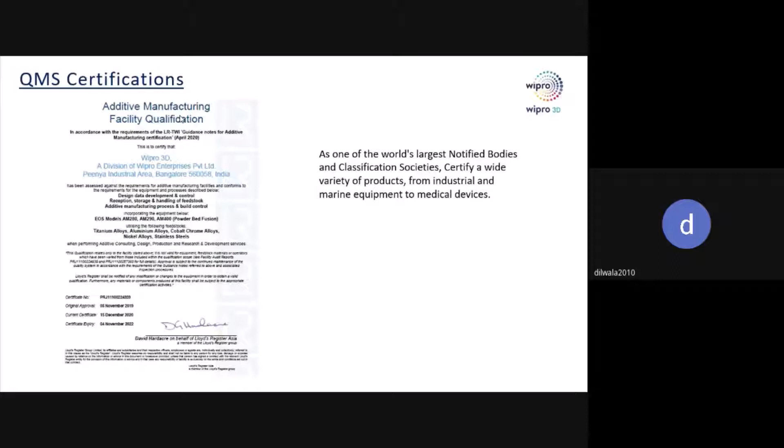This is the reason oil and gas customers from Europe and USA show interest in Wipro 3D. Without these sort of certifications, getting orders from them would be really difficult. We also have Honeywell certification. We had an audit by Honeywell.

Honeywell have their own certification process, which they call Approved Processing Source List or APSL. They do a detailed audit very much similar to LR, but more stringent, more detailed. They look more into how we manage the powder, how powder quality is ensured, how we control the build, how build quality is ensured. These are strikingly different from standard processes, as these fall under special processes.

All OEM customers conduct their own special process audits in line with the NADCAP audit checklist. If a supplier is approved by NADCAP, then they approve them directly. If they are not approved by NADCAP and they are going to perform any special processes, then they do their own internal audit as per the NADCAP audit checklist, and they provide certification.

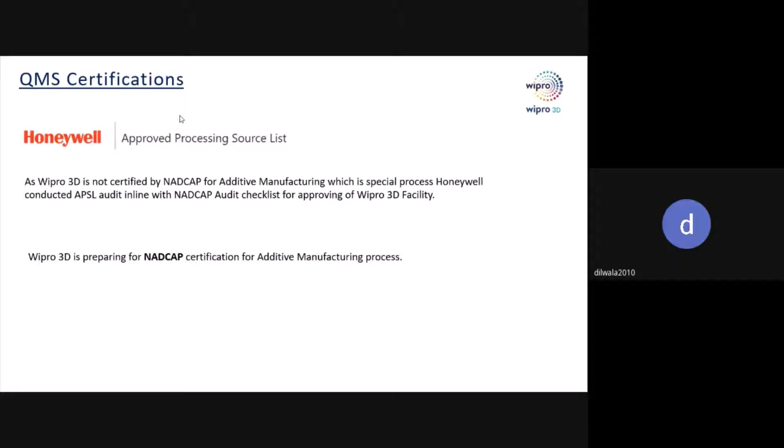Because we were going to do 3D printing of parts for Honeywell, and we don't have NADCAP, Honeywell conducted an audit and has given the certification. So these are the different certifications related to different industries. Let us assume you are an automobile industry supplier. Then you need to have TS 16949 certification, which is very much similar to ISO plus the special requirements of the automobile industry.

If you are an aerospace, space or defense supplier shipping parts to customers, then you need to have AS 9100D or EN 9100D, which are both equivalent. This is ISO plus additional requirements related to the aerospace and space industry. If you are performing special processes for aerospace, space or defense, you need AS 9100D as well as NADCAP certification. We will discuss more about NADCAP in further slides.

If you are supplying to medical industry customers, then you need to have ISO 13485 certification. If you are doing special processes for oil and gas customers, then you need Lloyd Register certification. So these are the different types of certifications related to different industries.

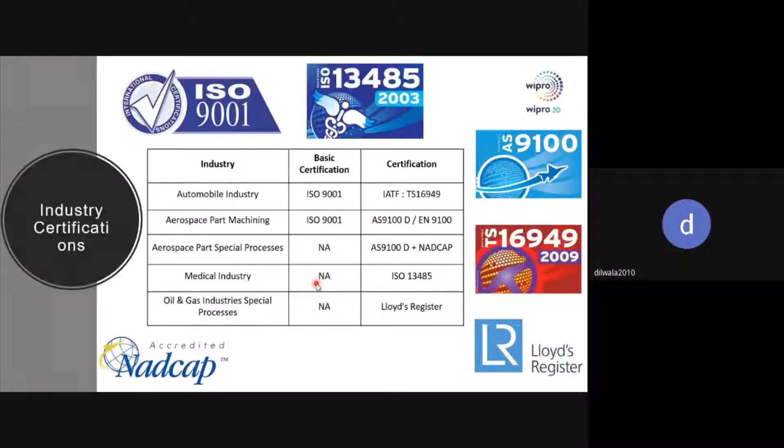International Aerospace Quality Group. This is the body which establishes all the aerospace standards. It was formed by AAQG, the Americas Aerospace Quality Group, EAQG, the Europe Aerospace Quality Group, and APAQG, the Asia Pacific Aerospace Quality Group. All these three quality groups together formed the IAQG Council.

All the AS standards like AS 9100D, AS 13002, AS 13003 are released by this IAQG Council. Say there is a standard called 9100. If we got certification from AAQG, the certification will be named AS9100. If we got certification from EAQG, the certification will be EN9100.

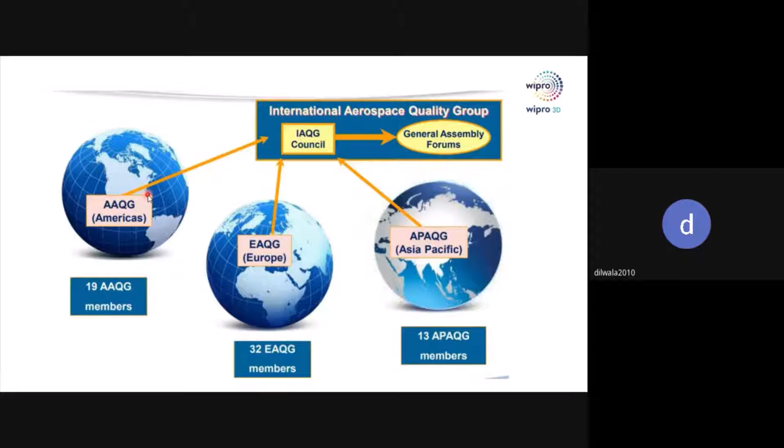If we got it from APAQG, it will be KS9100, which is the Korean standard, or JISQ9100, which is the Japanese industrial standard. The requirements are the same, only the certifying body differs. So all these are equivalent standards. Then comes AIAG.

In the automobile industry, AIAG was formed by the Big Three way back around the 1980s: Ford, Chrysler, and General Motors. These three realized that as they need to produce thousands of parts in a day, doing 100% inspection was not possible, so they needed to identify a way where they could get away with doing sampling

inspection. So these three started AIAG, and they released several standards like the APQP manual, PPAP manual, FMEA manual, MSA manual, and SPC manual. All these different standards they released are more suitable to automobile series production. Currently several other companies have joined the AIAG Council.

PRI is the main certifying body for NADCAP. NADCAP stands for National Aerospace and Defense Contractors Accreditation Program. So PRI is the main certifying body for NADCAP, and this is a not-for-profit organization affiliated with SAE, Society of Automotive Engineers. Generally, OEM customers ask for AS9100D certification or equivalent for conventional machining suppliers, and for special process suppliers, you need to have NADCAP certification.

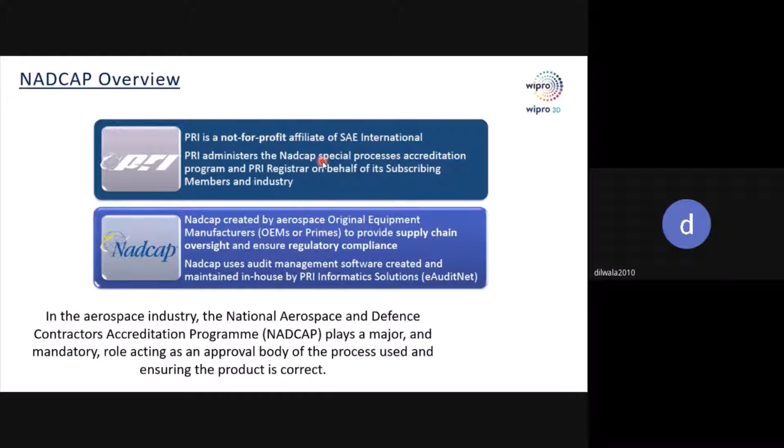Just if you are wondering what these special processes are: any process which modifies or changes the inherent physical, chemical, electrical, or metallurgical properties of a particular item, or non-conventional methods which remove or deposit a material on an item during or after fabrication, which cannot be evaluated by non-destructive means, or those used to maintain process controls such as non-destructive testing.

So in our case, which is 3D printing or additive manufacturing, these two clauses are applicable for us because we do modify the physical, chemical, and metallurgical properties of an item. And in this, we deposit the material on the item, which cannot be evaluated by non-destructive means. So without doing a tensile test or some other test, you cannot say that your part meets the different requirements, right? By non-destructive means, we cannot say that our part meets the requirement.

So in special processes, what they suggest is to identify all the inputs which affect the output, and have control on all the inputs. If you are controlling the inputs, automatically you will have control on the output. So identify all the inputs, establish controls like upper limit and lower limit for all the inputs, and control them so that you will have control on the output.

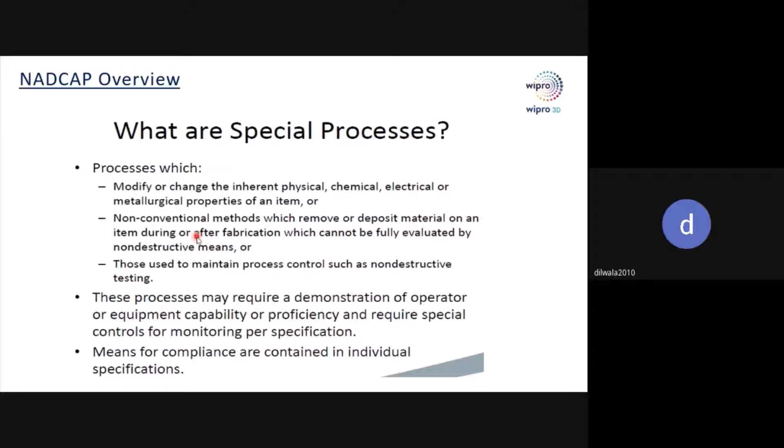So these are the different special processes. All non-destructive testing comes under special processes, like radiography, fluorescent penetrant inspection, or magnetic particle inspection. Welding: all fusion welding, diffusion welding, laser welding. All chemical processing, like chemical milling. All heat treatment, like solution treatment, stress relieving, aging. All coatings like primer, chemical conversion coating, anodizing. All these come under special processes.

One thing that we need to remember here is that the terminology of special process may vary from customer to customer. For example, a few customers may say CMM is not a special process for them. I know OEM customers like Boeing who consider CMM a special process, so there is a NADCAP certification for CMM as well. Some customers may say material testing is not a special process; a few more may say it is. So in our case, additive manufacturing falls under welding, so it is considered a special process.

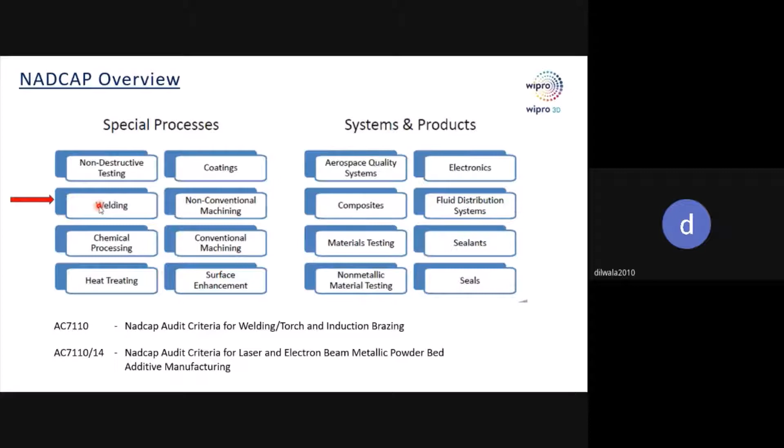So with this, this is the end of the part related to certifications. If you have any questions or queries related to certifications, you can ask now. Okay, so I think we can go to the next slide. I will be stopping at regular intervals, so if you have any questions, you can ask at that moment so that we do not interrupt the flow. Okay.

So, quality in additive manufacturing. When we say quality in additive manufacturing, we get a CAD model from customers. Then we analyze it: can it be manufactured in AM or not? Let me just give one example before going to that.

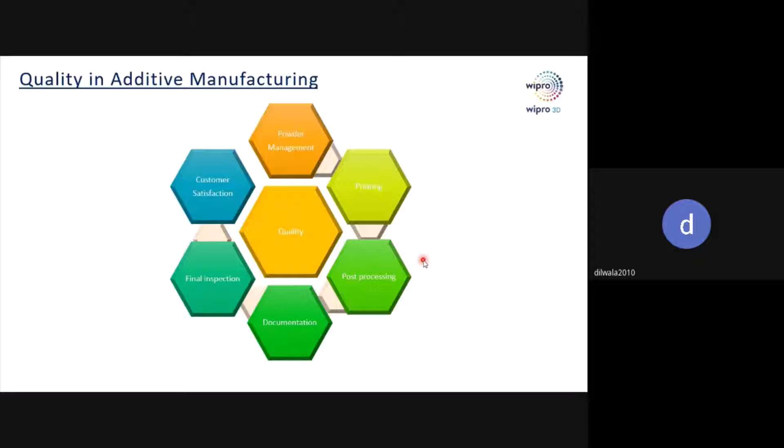So the first thing is unique raw material. In traditional processes, once you get a billet or forging, you always get a material test certificate, which is MTC, which will give the heat number and all other details, which can be traced back to the part quality that mill supplier assures you. Here, that MTC is not there. That is the first thing missing. How to qualify the powder, and what all precautions we take when we say the build quality is good, above average, or beyond the expected value of the machine provider.

So we come to the details, focusing here on raw material and build quality. Because if you think of the process, the raw material is powder which is being laser sintered, and the build process is very much different from traditional conventional manufacturing processes. In conventional manufacturing processes, you input a billet or rod, and then you do machining processes, turn it, do a variety of CNC machining to finish the final good. But here you input the powder, and you have to ensure that powder is of right quality and quantity. Every time part is freshly built, right?

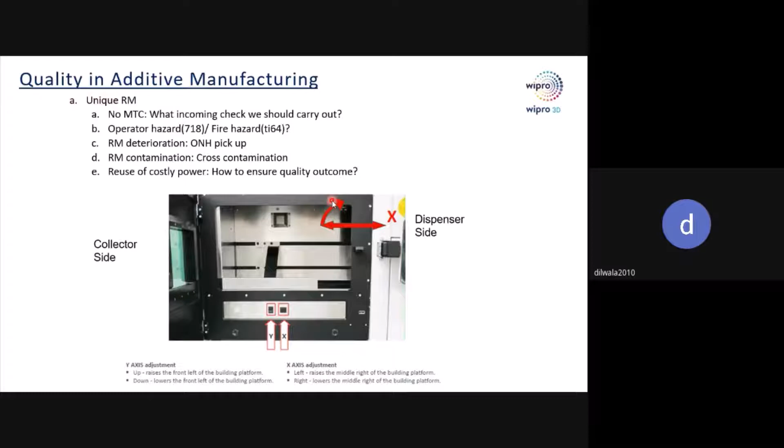Just let me play this video. So once one layer is built, our build platform goes down by the predefined layer thickness. After it goes down, the recoater goes towards the dispenser side, collects the powder and spreads it onto the bed. So it collects the powder and it will spread it onto the bed.

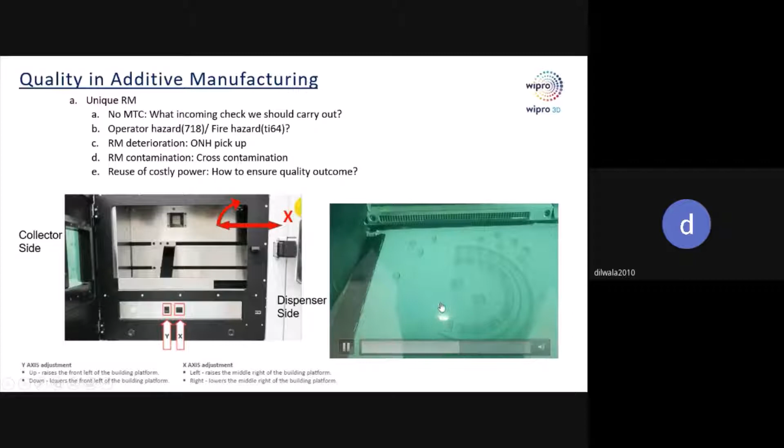Now again laser sintering starts. So gradually... sorry. So this is how the laser sintering happens gradually.

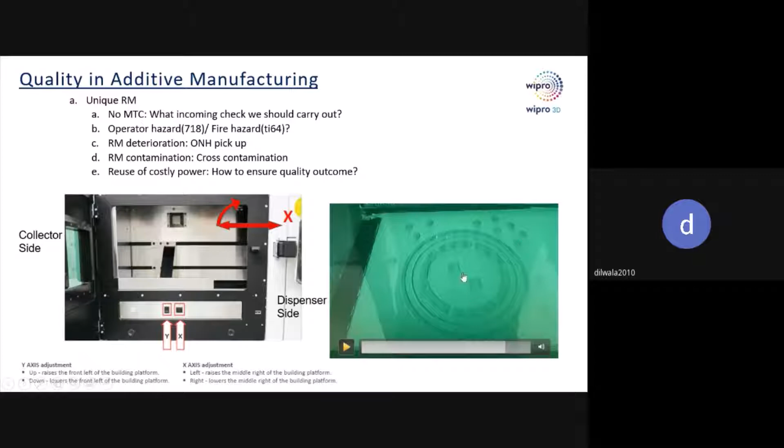So one thing that I want you to remember is whatever you can see here, all of this is a component. And whatever cylinders and squares you can see, these are coupons. We will see why we are printing coupons along with the part in later slides. You just need to remember that we print coupons along with the part. Now it is just covering the contours of the profile. Outside contours, it is just sintering.

So once the layer is completed, immediately it will go down by the predefined layer thickness. And once again, the recoater goes and fills the part. So this is how it happens. So let us say, for example, my component is of this height. Okay. This is my component. I'm building layer by layer. So when I come to this layer, my component will be something like this. And my build chamber would be something like this.

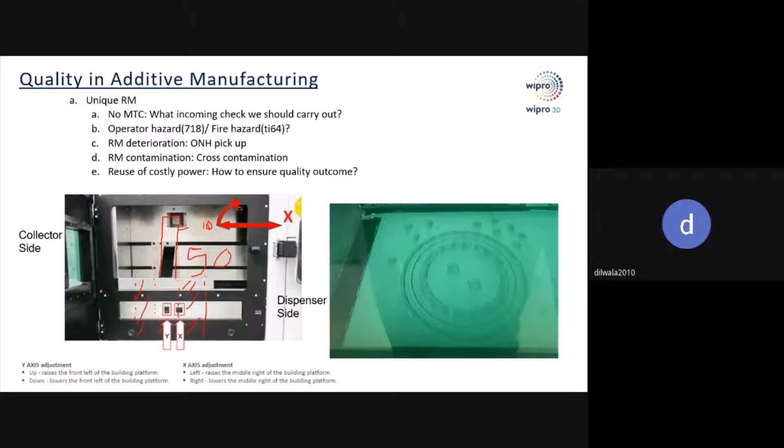We will start, we will stick to the unique RM. So you might be thinking, why can't we have a dedicated machine for each material? Let me give our own example. We have like 3 machines in our facility, and we operate like 13 materials. So having a dedicated machine for every material is practically not possible. We have to use different materials on the same machine.

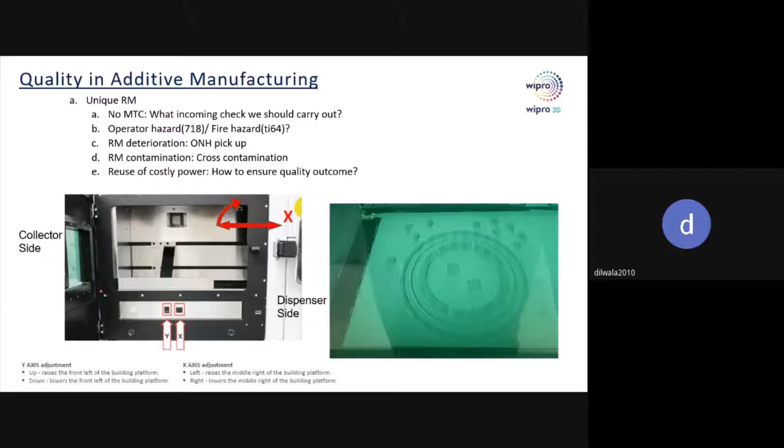How the safety data sheet is important is, certain powders are fire hazards. Two of them are titanium alloy and aluminum alloy. These are Class D fires, which cannot be extinguished by an ordinary fire extinguisher. We need to have a Class D extinguisher to put out metal fires or metallic fires.

Powder handling is generally done at these following places: receiving inspection, issue of raw material, during sieving and filtration, and filters. Generally, filters are filled with powders and particulates, so they have a high risk of catching fire. They can be real culprits. So you need to be absolutely careful about how you are disposing of them and how you are storing them in scrap yards.

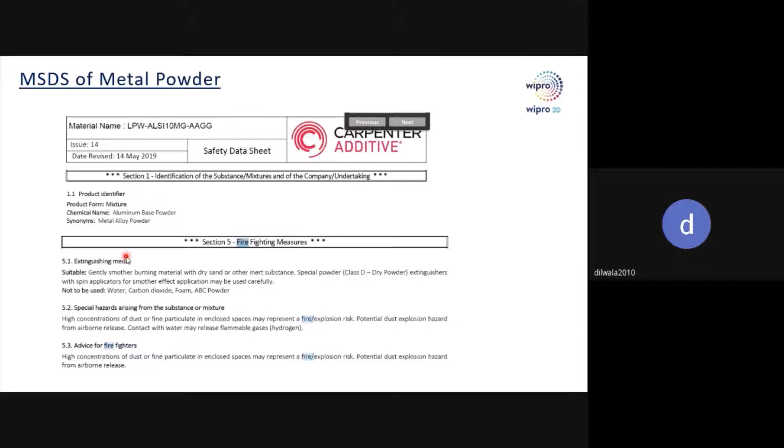MSDS also provides what immediate action is to be taken in case the powder has touched your eyes or you have inhaled the powder while cleaning.

Considering all these inputs from the MSDS, we take controls like anyone entering the build area must always wear a nose mask and safety goggles, especially while performing the cleaning. So while performing the cleaning, they wear a full suit for doing the cleaning.

So initially, when we started way back in 2013, 2014, we used to get powders from our suppliers, and we used to receive them with folded hands and never asked them what quality they were delivering. Whatever was delivered, we tried to manufacture with that.

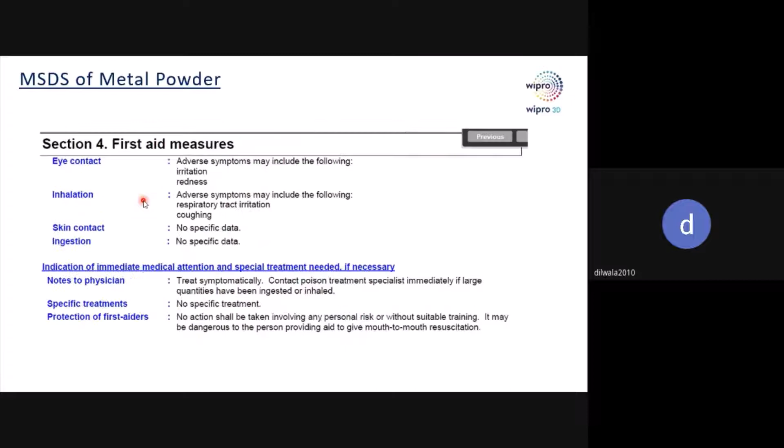We specifically say what chemistry is required, what different tests are required. So we flow down all these requirements. We have every right to reject the powder if the requirements are not met.

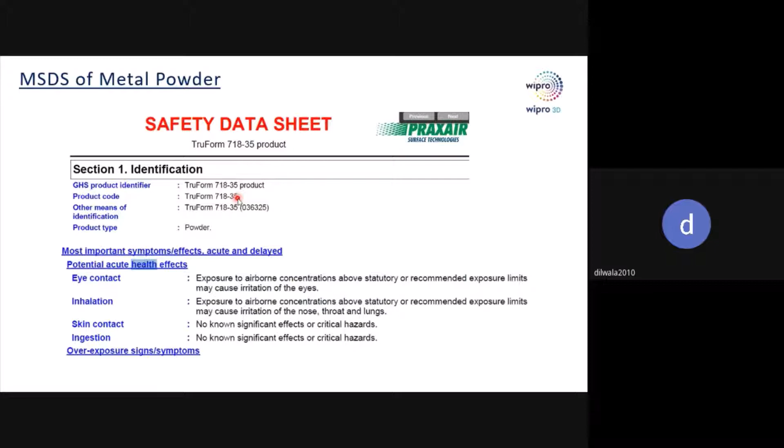So I will be showing you what we typically do for powders.

So nowadays we are very clear about what are the different tests we have to follow: chemical composition, flowability, apparent density, particle size distribution, morphology. We also clearly define which standard applies to which test, what morphology we are looking for, and what defects are not acceptable in morphology. We are very clear about what we want, and we flow down these requirements to the suppliers.

Even after defining all the controls and flowing them down to the supplier, we still notice a few issues during receiving inspection. So I will show you some typical examples so you can understand what sort of issues we can come across during receiving inspection.

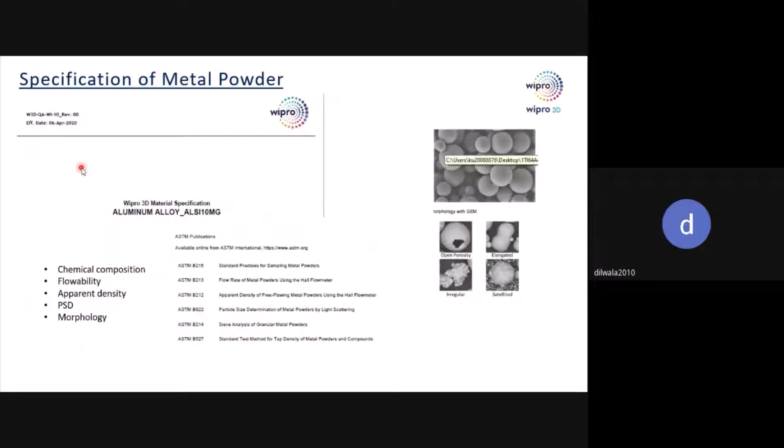Then comes microscopy. We expect the powder particles to be spherical in shape, but in this lot some have a satellite structure, some are irregular, and some are elongated. These are different types of issues that arise in morphology. The problem is, let's assume we have an elongated particle—when melting, this end gets melted and projects onto the outer surface of the part, affecting the surface finish or causing other effects.

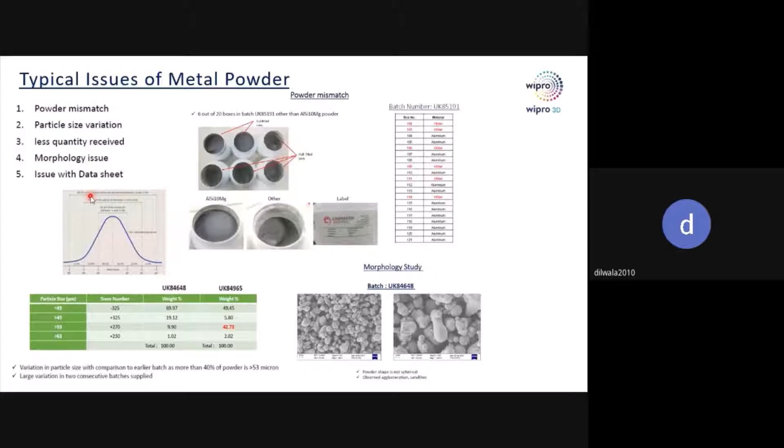Then there are issues related to data sheets. As I said earlier, we clearly define which tests the supplier has to do and which standards to follow for those tests. Sometimes we observe that in data sheets, some tests are not being performed, or not reported, or some evidence is not provided. So we need to ensure all data sheets are properly issued. Sometimes we don't receive the MSDS, and as I said earlier, the MSDS is very important—we need to receive both the COC and MSDS from the supplier.

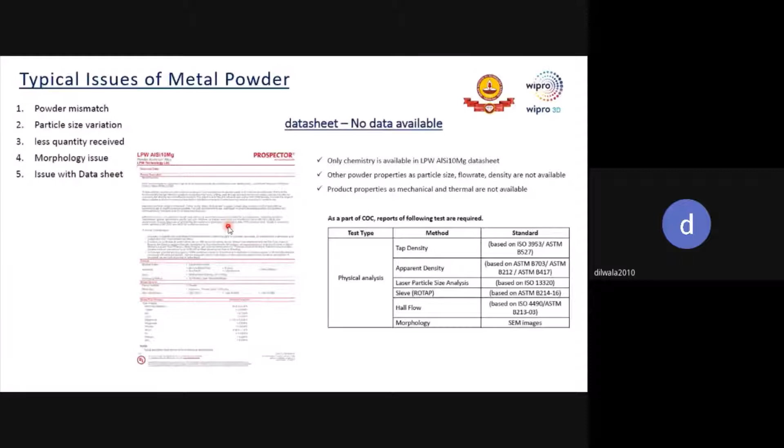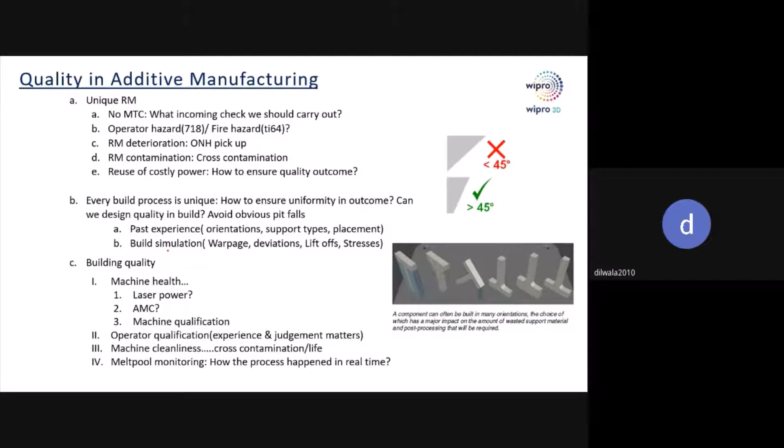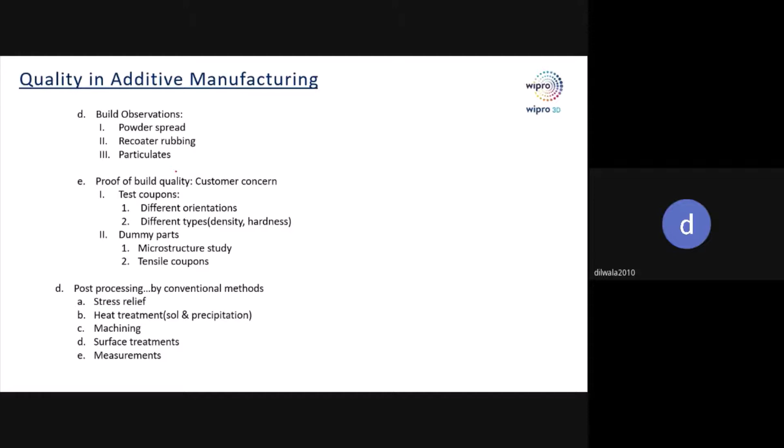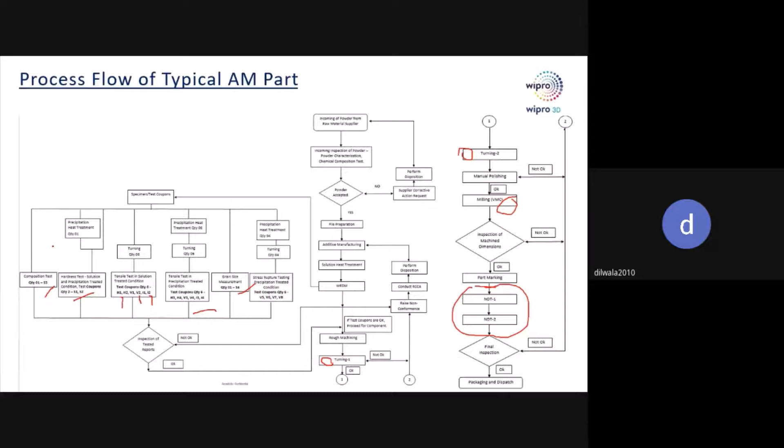Then comes powder management. In powder management, first incoming powder inspection, then powder traceability, then powder reusability, then prevention of powder contamination, and powder handling. These are the things that would be covered in powder management.

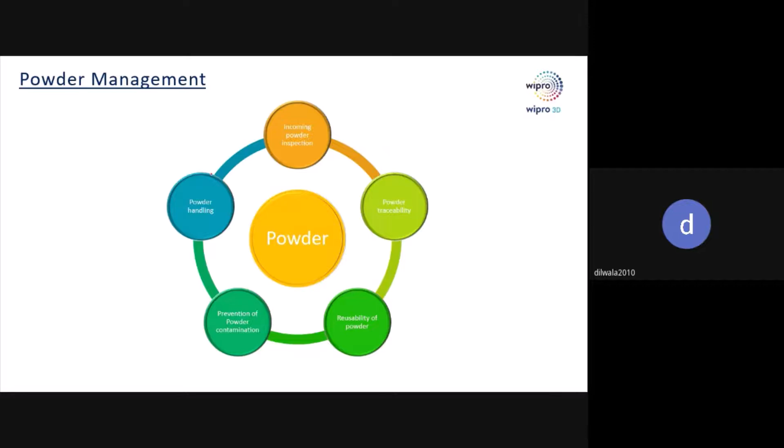First, incoming powder inspection. Like I said earlier, suppliers will provide us the certificate of conformance and MSDS along with the dispatched powder. First, when we look at the COC, we compare it with our flow down. We see: has he done all the tests that have been called out in the flow down? Has he used the same standard as called out in the flow down? Are all the results within the acceptance criteria and within the acceptance limit?

Once the COC is okay, then we select samples from the powder. Then we do all the tests that we have asked for in-house as well. If we don't have an in-house facility, we will outsource and get those tests done. What you can see on the left hand side is the certificate of conformance test given by the supplier. What you can see on the right is the chemical composition results which we have done from an outside vendor, and we compare both the results.

The reason behind this is powder is the key aspect of additive manufacturing, which defines all my properties. All these are dependent on powder. This is the key input for me. Like I told earlier, for a special process, you need to have control on the input so that you can have control on the output. Because powder is the key input for me, we control it in the receiving inspection stage itself.

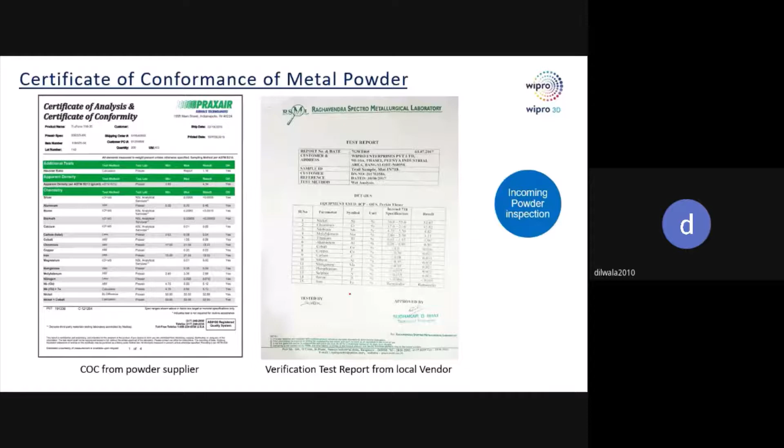So these are the different tests that we do. PSD, or particle size distribution. In this, we check how the powder is distributed. As we know, if we ask for 63 micron powder, every particle may not be 63 micron. It may fall anywhere between 45 to 75 microns. The distribution is calculated by sieving the powder, weighing it and deriving the proportion of each particle size.

Then comes flow rate. In this, we let the powder flow from a known predefined cylinder and see the time it takes to pass through it. This determines how the powder will be spread during the build. Then comes apparent density. In apparent density, we check the density of a known volume of powder and derive the apparent density. This determines the mechanical properties that can be attained.

Then comes tap density. In this, we tap it a predefined number of times and then check the density. We continue this activity till we see there is no more change in density even after increasing the taps. Then we measure the density and decide whether the powder is accepted or not. This parameter governs the mechanical properties of the part.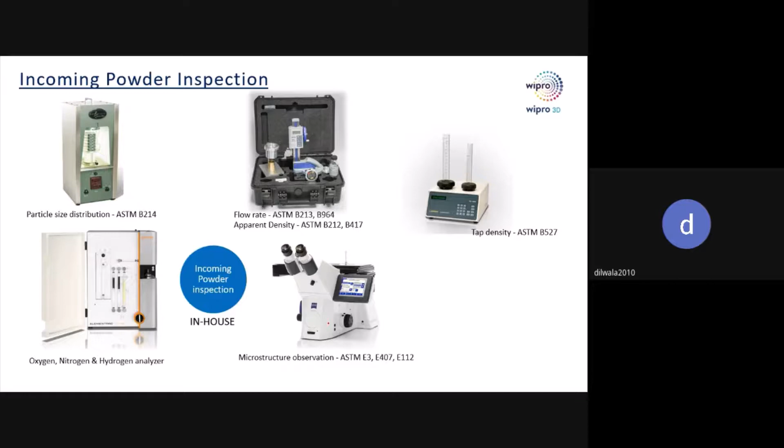Then we do ONH analysis. We check what the ONH levels are in the powder. It is required to monitor the ONH levels because these define the mechanical properties. Then microstructure analysis. We do microstructure analysis for the coupons which have been printed from the specimens. Then we do tensile tests of coupons which have been printed from this powder.

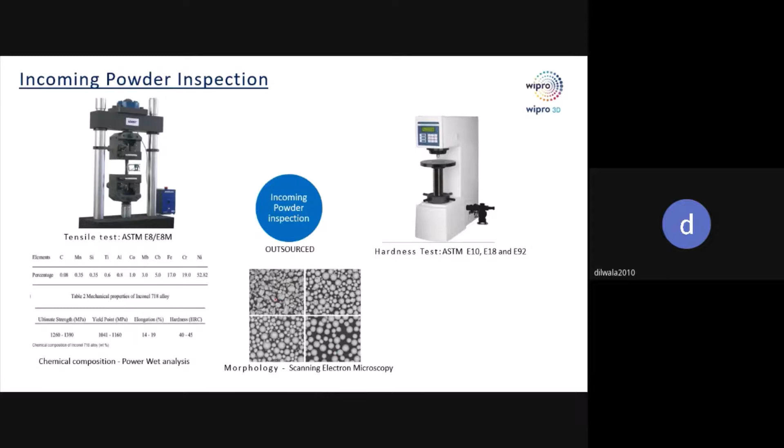Then we also do hardness testing on the coupons which have been printed using that powder. Then these are the microscopy morphology images seen by SEM, which is scanning electron microscopy. Once all of these are done and all are meeting the requirements, then we accept the powder.

Then comes powder storage and traceability. Like I told earlier, there are some powders which are highly flammable. So we put them into these inflammable cupboards. These cupboards do not catch fire; these are fire resistant type of cupboards. So we store all the powder boxes in these cupboards.

Then in order to ensure traceability, when we get the powder boxes, as you can see here, we provide numbers on each box. Say, for example, we got AlSi10Mg powder from LPW. We name it as 1, 2, 3, 4, 5, depending on the number of boxes. If a new lot is received tomorrow, it will continue from there. Say, for example, yesterday it was 1 to 10. So today's lot will be 11 onwards, depending on the end number.

So we ensure that every box will have its own unique tracking. The reason behind this is we use something called a visual powder management system. Basically, there would be a sticker on this box. By looking at the sticker, I can say what this powder material is, who the supplier is, what the lot number is, and how many times this particular powder in this box has been used.

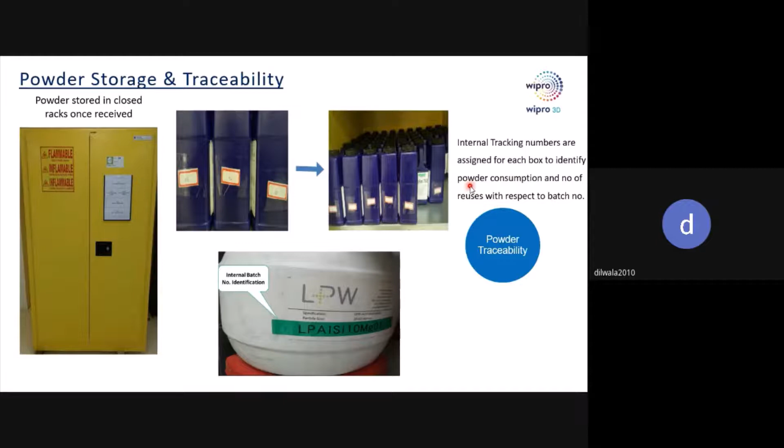Then comes powder reuse and mixing rules. So, like I said earlier, for printing 10 kg of powder, we would be putting in around 50 kg, right? So it is not always possible for me to have virgin powder. So in order to ensure powder quality, we have classified them into 3 different categories. The first category, category 1, is where we have used powder from 0 to 5 times. After the 5th reuse, we do powder characterization, which means particle size distribution, flow rate, and tap density, to see whether the powder is within the acceptance limit.

The second category is if the powder has been used from 6 to 10 times; after the 10th reuse, we do powder characterization, which means all these tests plus chemical composition. Then category 3, which has been used from 11 to 15 times. After the 15th reuse, we check powder characterization, which means all these tests, then chemical composition. We print coupons as well and check the tensile properties and all other structural properties.

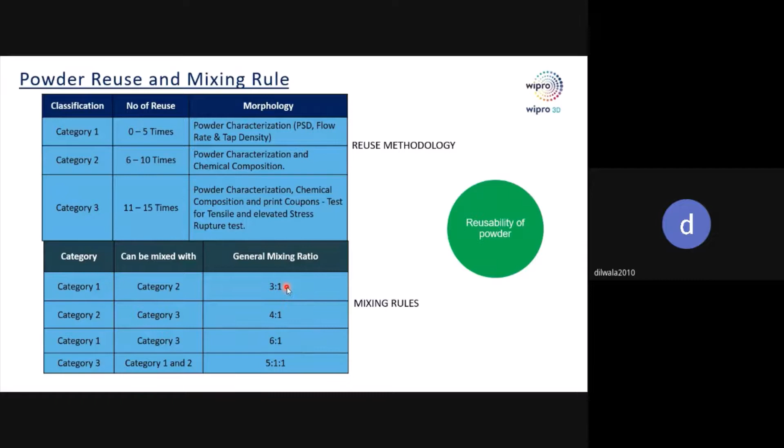Then comes powder sieving. There are two ways of powder sieving. One is manual sieving, the other is automated sieving. We have three automated sieving units with us. What we generally do is we have identified three materials which are fast moving, like Inconel 718, AlSi10Mg, and Ti64. For these three, we have dedicated IPCMs, meaning dedicated automated cleaning equipment. For all other materials, we do manual sieving.

In manual sieving, we put a sieve here in this area. Then we spread the powder. We push the powder onto the sieve, and we just sieve it. It is very much like making chapati. You do atta sieving, right? It's a very similar concept. You just pour the powder onto the sieve and use the scoop to segregate the particles. The unwanted particles will be left on the sieve, and the acceptable powder particles would pass through the sieve, basically.

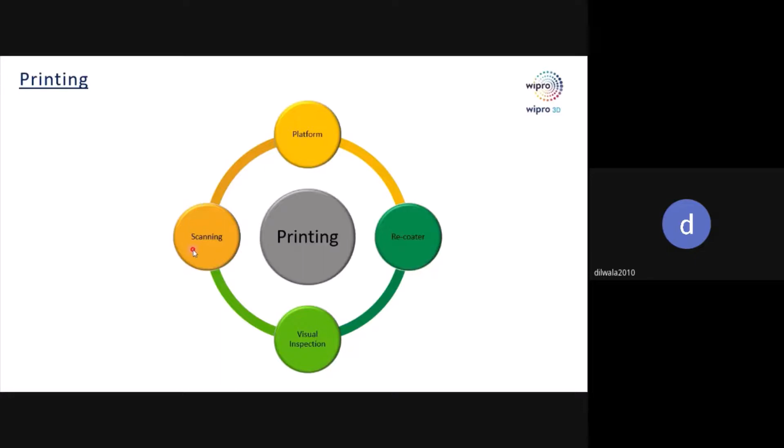Then comes printing. In printing, we need to look at 4 different aspects. One is platform, another is the recoater, visual inspection, and scanning. In platform, we need to look, are there any cracks? If there are any cracks, this would create unnecessary issues on the part.

Then, after doing program preparation, file preparation in a software called Magics, which we use for printing, the Magics software will tell us what is the minimum thickness required in order to absorb the temperature and whatever stresses will get generated. So it will tell us the minimum thickness required. Based on this, we will decide the thickness.

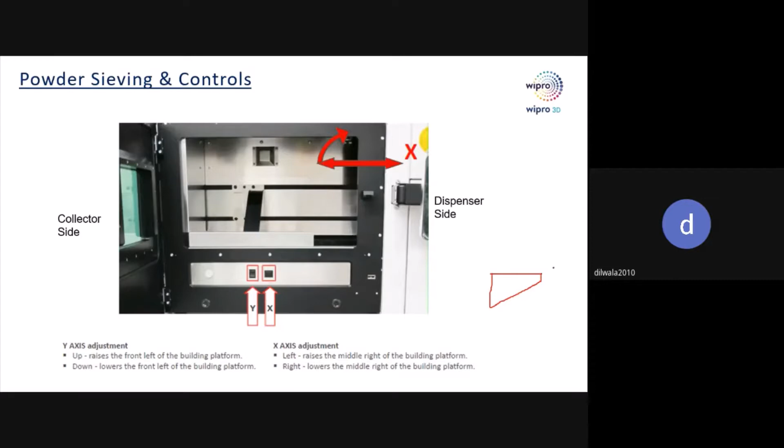Let us come to our slide. Flatness. If it is not flat, if it is concave or convex, like I showed earlier, we cannot do anything, right? If it is tapered, I can lift this height and I can do something. But if it is not flat, I won't be able to do anything. Generally we say if the flatness is within 50 microns, we accept it. If it is greater than 50, we give it for rework basically. We cannot use that build plate for printing.

So this is what you need to keep in mind. Parallelism is not an issue because we can adjust even if the build plate is not parallel. But if it's not flat, then we cannot do any adjustment there. So flatness is important for us in the build plate. Not much worried about parallelism.

Okay. Then comes visual inspection after build. We need to visually look, is there any support failure? Is there any delamination? Is there any feature shift? Like I said earlier, step marks or something like that. Is there any feature shift?

Then comes the recoater. We need to see, are there any edge damages? Is the recoater straight? We just put it on a flat plate. On this we put the recoater and we just pass a feeler gauge and see if there is any gap observed. If there is no gap, then it is straight, no issues.

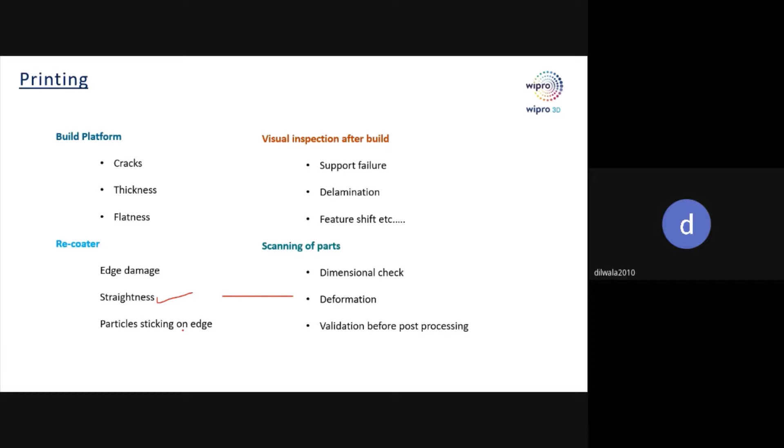If there are any particles sticking on the recoater, it can cause line marks on the part. During melting and solidification, the part will be at very hot temperature. If any particle is sticking on the recoater, it's very possible that it can cause a line mark or step mark onto the actual part during build. So we need to see that no particles are sticking onto the edges of the recoater.

Then comes scanning of the part. There are two cases here. If the customer provides us a drawing, we do inspection as per the drawing and provide an inspection report. If the customer provides a model and doesn't provide a drawing, then we do a FARO scan of the component. We compare the scan with the model, do color plotting showing how much variation there is, and share the reports with the customer. So: if there is a drawing, we inspect as per drawing and share it with our customers. If there is no drawing, only a model, we inspect as per the model and share it with the customer.

Deformation can generally be seen by the amount of distortion. If there is more variation, we can see more variation in the scan results.

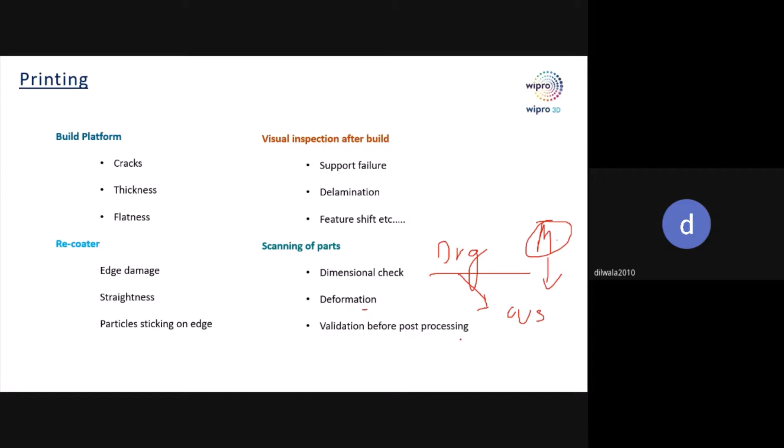Delamination: when the residual stresses exceed the tensile strength of the printed material, this sort of delamination or heavy warpage or distortion will occur on the parts. This is delamination. This is cracking. If the energy source is too strong, stresses will occur during the solidification process, resulting in cracking.

If it lifts up from the build plate, it is delamination. Our build plate is here. Lift off didn't happen here, it's happening somewhere around here, so this is cracking. If it happens here, it is delamination. You see, right? It is happening at the intersection of our actual part with the build plate, so this is delamination. Here it is not happening - it's happening on the part after a certain number of layers during solidification, so this is cracking. This is the difference between delamination and cracking.

Then comes warpage. If thermal stresses generated during the process exceed the strength of the material, the build plate will undergo warpage. Like I told earlier, if you fill the build plate with more parts, there will be more exposure area on the build plate, and there's a high chance you will get warpage in this way. Can you see how the build plate has got warped?

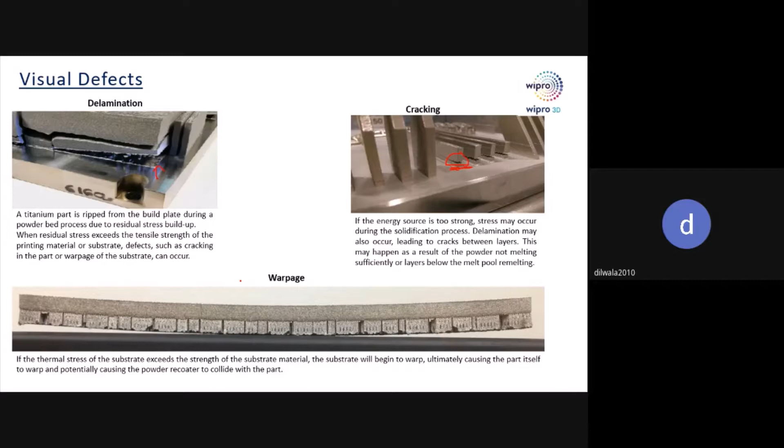Then the balling effect. Due to lack of wettability with the previous layer - let's say, for example, this is my build plate and the laser is moving. If it's moving at the correct speed, it will correctly melt all the powder and give a uniform layer thickness. Let's assume the laser is moving at a very high scan speed, then it will move very fast. What happens then? A certain amount of the layer will be melted, a certain amount will not be melted, and so on alternately. This is called the balling effect - here it will be melted, here it won't, due to high scan speed. So when the scan speed is high, this sort of balling effect occurs.

These are different geometrical defects that can occur. The sharp corners have got damaged here, here, and here. Then this contour has not formed properly here and here - can you see the contour is not formed properly? Then the lattice structure has got damaged. For these sorts of things, we always prefer a soft recoater. If you don't use a soft recoater and use a hard recoater instead, these sort of issues can happen.

Then the support interface: here the support is coming and matching with the actual part. See, it is matching with the actual part - this will be difficult to cover afterwards. These are the different visual defects that can arise on the component.

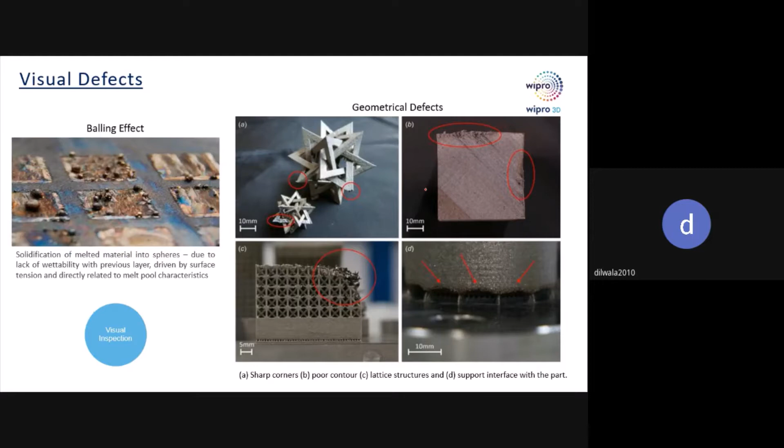Then comes post-processing: wire cut. In wire cut, what we're basically doing is separating our component from the build plate. That's it. The only purpose of wire cut is to separate our component from the build plate.

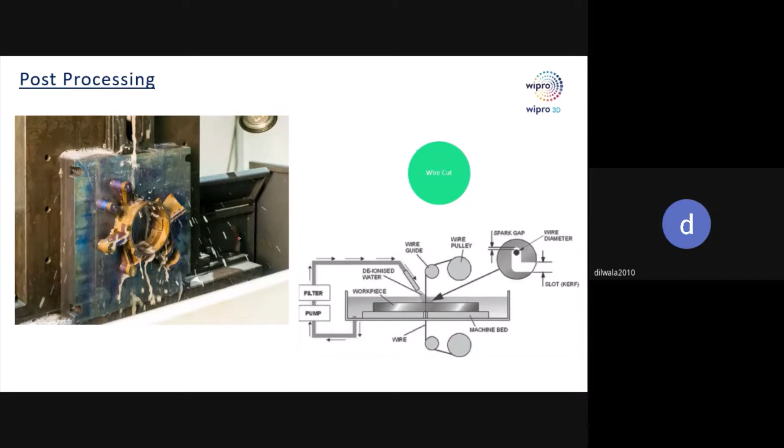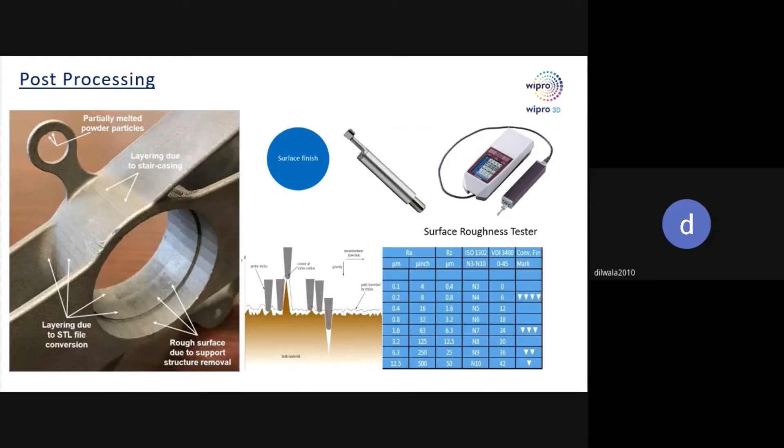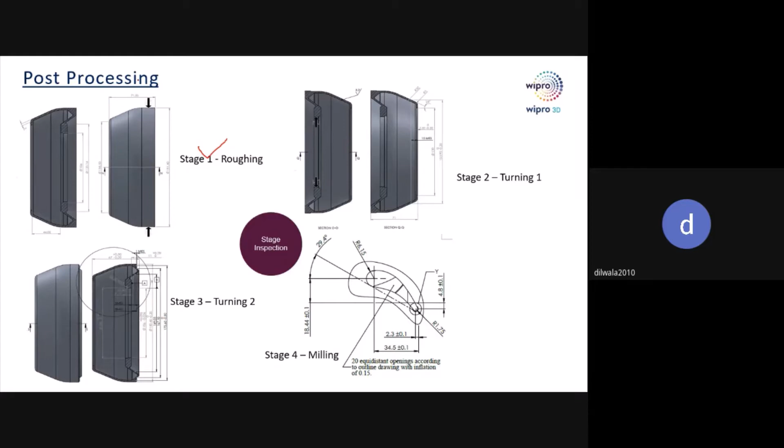Then comes post-processing. So whatever turning, milling, or other post-processing is involved, we do stage drawings and do inspection as per those stage drawings.

So these are the different GD&T parameters that we use. Flatness will help us understand if there is any warpage on the top face. I told you, if there is any warpage, we'll be able to identify it. Let me do a little introduction on these GD&T symbols so you understand better.

Straightness basically checks whether a line is concave or convex—it will say it's something like this. Then it takes the topmost surface and the bottommost surface, and the height from crest to trough is the straightness. This is straightness of a line.

If you're talking about flatness, it talks about the full surface. If there's a full plane, with lines at various distances across the whole surface, it checks the straightness at those distances and then says this is the flatness of the surface. So straightness is of a line, flatness is of a surface.

Circularity is when you check roundness at one location. If you are checking throughout the cylinder, then it is cylindricity.

One thing you need to remember: straightness, flatness, circularity, cylindricity are independent features. They do not require any datums. Nowhere in the drawing will you see straightness with respect to a datum—it's an independent feature. These are form features, and all form features are independent features. Flatness is an independent feature, circularity is an independent feature, cylindricity is an independent feature. Nowhere will you see these with datums.

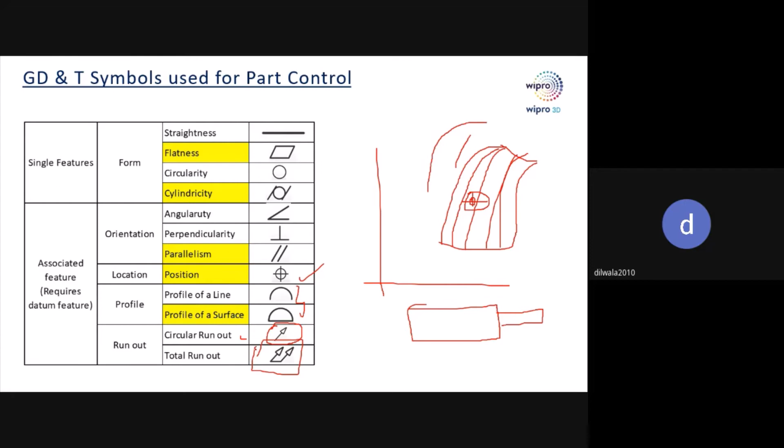Now that we have some understanding of GD&T, flatness will help us understand how much warpage is observed on the part after build. Cylindricity will help me understand how the hole formation is - is it oval, is there any taper, or what is the variation in that particular hole. Cylindricity will help us understand that.

Parallelism, like I told earlier, if there is warpage, we will be able to understand how the parallelism is. Flatness tells only about the top surface or only the bottom surface, while parallelism tells how it is from top to bottom. True position, like I told earlier, checks are the positions correct.

Is there any variation observed in the face - let's say we have a square block like this, this is my datum and this is my datum. If he says this is 100 mm, is it correctly 100 or is there a variation? True position will help me understand that.

Then profile of a surface - like I told earlier, every part may not be square or rectangular. You may have curves, contours, profiles. So profile will help us understand if the contour surface is properly built. These are the different GD&T parameters that we use in quality control of 3D printed parts.